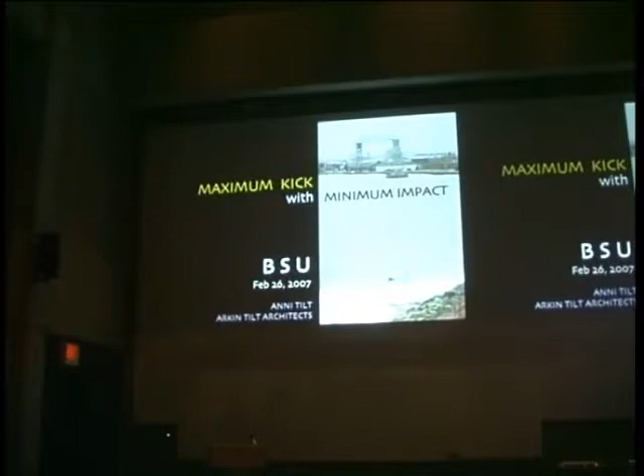Okay, this image, I just have to explain, we were actually up in Duluth. The Minnesota AIA has their design retreat up in Duluth, which seemed quite bizarre to me, but it's true that when you're out there, you're no longer in the city. You're somewhere else altogether. Oddly enough, this bridge, one of the first jobs my husband had, he actually went to the University of Minnesota. He did the measured drawings for this bridge when he was working for the engineering survey.

But what this picture is really about is this little guy down here, very entrepreneurial. He just took a blue tarp out there, and there was a big strong wind as the storm was coming up, and he sat on, I don't know, a piece of cardboard, who knows what, and zipped his way around the lake just with his blue tarp held out and some serious wind power. So there's minimum impact for you.

Okay, let me start in here. I don't usually like to do the doom and gloom slides too much, but this was a major story in the National Geographic in 2004 about the end of cheap oil. And I think that the implications of the use of oil over the course of time are going to become really imminent. I don't think we're going to run out of oil, but it's going to become a question of equity.

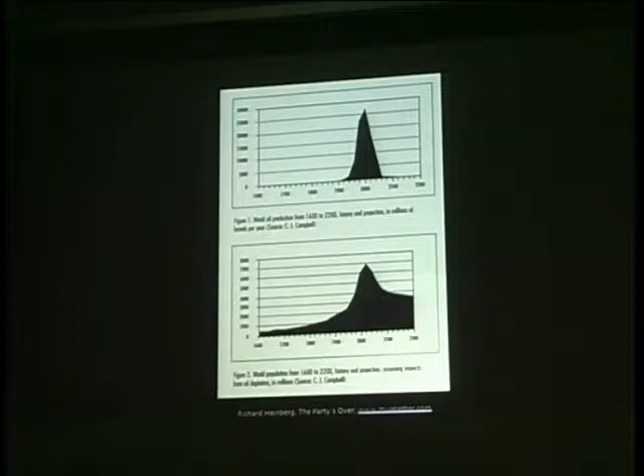This is from Richard Heinberg's book, The Party's Over, showing the correlation between world oil production peaking and the effect on population, as right now oil affects food production as well as the way of life. So these images are from a book called The Return of the Solar Cat, which is really wonderful if anyone is able to pick it up.

But the sort of human solution of, brr, I'm cold, and he goes to the ends of the earth and mines everything up, builds this elaborate procedure just to fire up his solid-state electric blanket. And what we're sort of advocating is a more simple, back to the basics approach, where the cat solves it in 2 steps. And this is our solar dog, the office dog, illustrating the point where he just follows that little chunk of sun around as it moves from the front door.

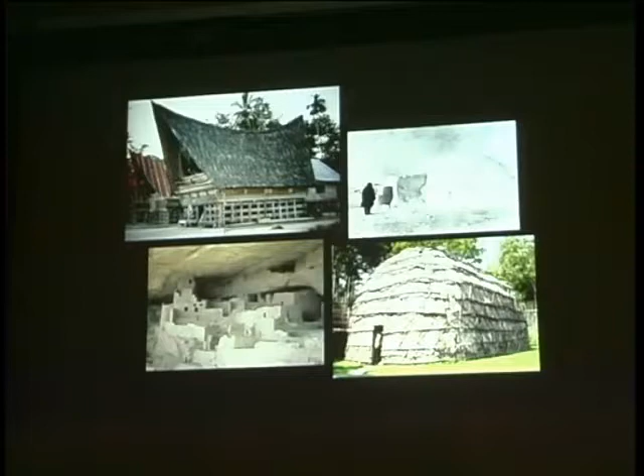Of course, ecological design is not a new idea in any way. It is only with the advent of heating and ventilating and air conditioning that we're able to manipulate our environments. So all of these buildings are responding to their climate using local materials, as well as having some fanciful details.

All this we sort of summarize in something we call maximum kick with minimum impact. And some days I don't really know what that means, but I think it's sort of an ecological bang for the buck. And so I'll just go through our goals quickly. The first goal, harmonize with the site. Really, the site is the starting place, whether it's rural or urban. Both the context, the views, the history and culture, the soil, the plant communities, wind directions, climate, all of these things come together, and that's really where we start the process.

The second goal, build as little as possible. Sort of an odd thing for architects to say, but I think that if you're looking to reduce energy loads and reduce resources, if you have a smaller envelope, there's less to heat, and then you can actually hopefully allocate the finances to details as well.

So third goal, buildings should be able to heat and cool themselves and generate their own electricity. A little harder in Indiana than it is in California, but I still think that there's a lot of technologies out there that can make that possible, and we should at least move towards that goal.

Fourth goal, maximize resource efficiency, really looking to the life cycles of the materials that we're using. Straw is a waste product, and getting the most out of each thing that we use, and not just the most in terms of thermal performance or structural performance, but also aesthetic performance.

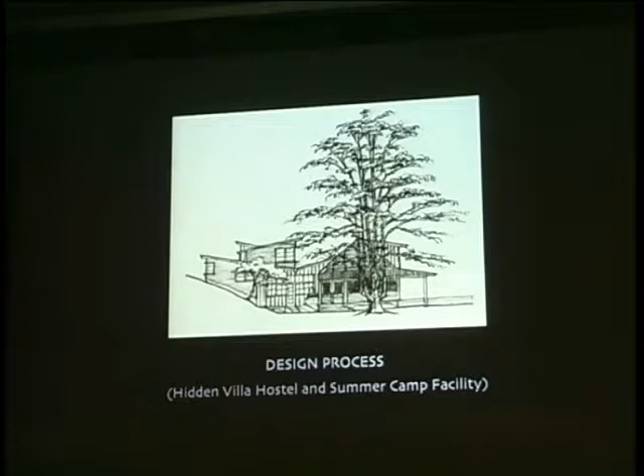I'm going to walk through our design process. Regardless of the size of the project, we use a pretty similar process. And I'm going to do that using a project we worked on about 6 years ago now, the Hidden Villa Hostel and Summer Camp facility in the South Bay. And it's on an ecological education farm, and they have had a hostel on the property since 1937. So our mandate was actually to replace it and provide the summer camp facility.

Does that work? Okay, if that's good enough, then I won't worry about it.

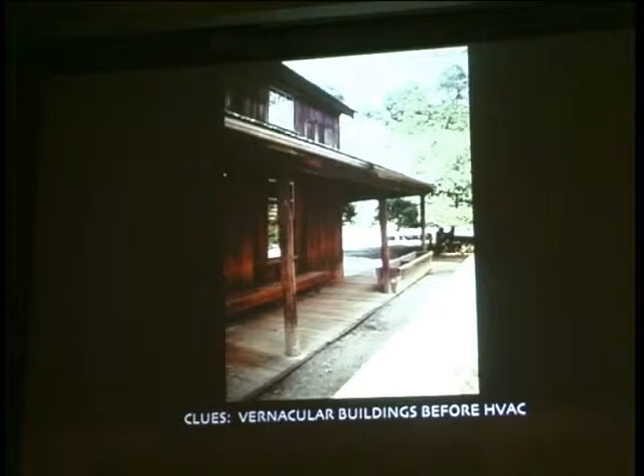Again, it's always fun to look at anyway, but old farm buildings, porches, overhangs, kinds of materials: what clues can we take from these buildings and build on that. Understanding the users, of course, is very important. In this particular project, they had up to 70 campers in the summertime, and then the rest of the year it's just a hostel, so there's actually very few people. So that was something that we had to work with.

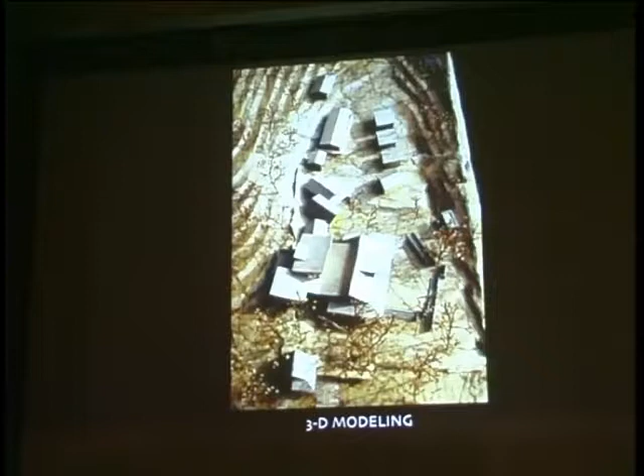And with every project, we explore options. Two to three usually, sometimes four, sometimes eight, but we don't go there very often. This particular project, we explored them in fairly rough cardboard models because there was a 21-member committee, and the models could convey these rough ideas very quickly, and they actually slotted into a larger site model. There's the final version with its context, and then we can use it as a tool and do solar performance modeling on it.

This is at our PG&E Energy Center, the public utilities building, and they have something called a heliodon. At the daylighting lab, you have something similar? You've got a heliodon. You guys are set.

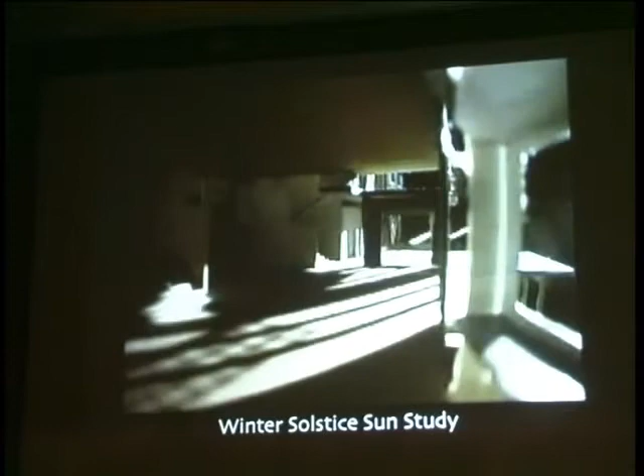So I won't explain how it works exactly, but there's a quick video, and again, these are very crude cardboard models with the idea that we can rip them apart and put them back together again. This is a winter solstice sun study on a project on the coast, really trying to get the light deep in the building. We also do thermal performance modeling on the computer when it's appropriate. This is actually an example from a project in China, much more challenging.

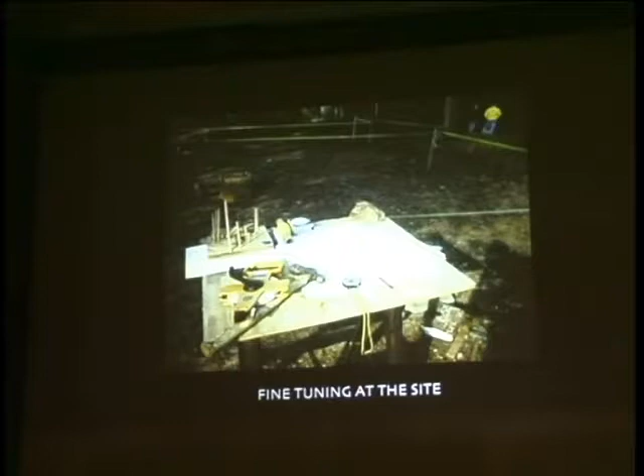Fine tuning at the site. Every project, you can see it's a fairly raw drawing. We'll take it out and stake it out and adjust it in terms of views or trees, or the survey's always wrong, so some large slope is different. And then collaborating with builders. This is more on residential projects, obviously, but as much as possible, we try to get them involved and get their ideas about fairly unusual systems, coordinated and as efficiently done as possible.

Building workshops is something we like to do when we're working with fairly unusual building systems, having a kind of demonstration project, a straw bale raising, or in this case, we actually did a rammed earth wall as a building workshop. It was for financial reasons as much as anything, because we couldn't afford to have it done any other way. But it was great because it got everyone involved, and there was a sense of ownership of the building as well. So this is the wall we built during the workshop. And we not only got a lovely wall, but we got this great staining on the floor from the dirt being dumped in and loaded up.

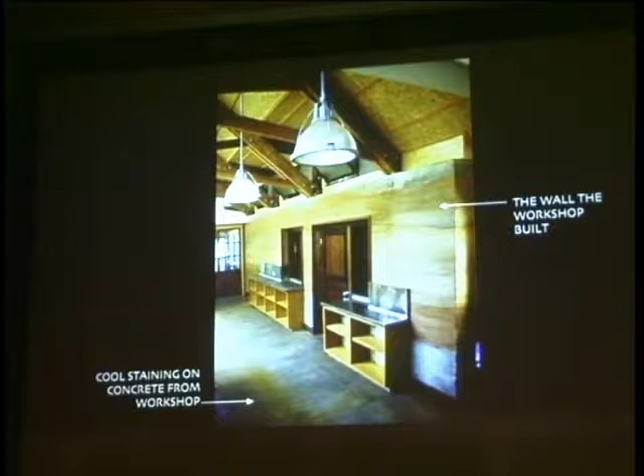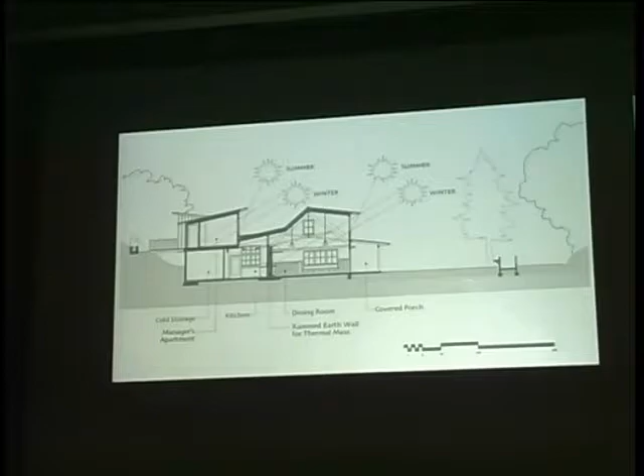Just a quick trip through this particular project. It's in this very narrow draw off of the main valley here. The idea is it's tucked behind what they call the sacred climbing tree, so that it's a little bit off the main path. And the entire building is pulled to the north side of this draw so that you get a sense of that canyon. Before, the hostel building just blocked the end of it like a dam. So this gives you a sort of flow up, as well as bringing sun into the dining room and the manager's apartment, where things like the cold storage and the kitchen are tucked away, thermally layering the section. Just a view of the dining room with its large clerestory.

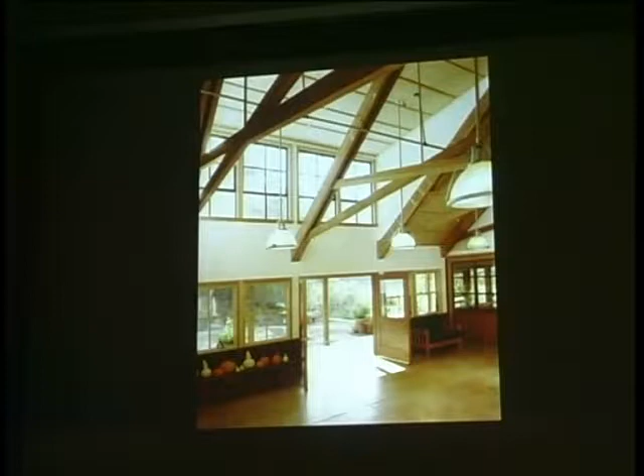All of the trusses here are salvaged fir. This is a pressed ryegrass board on the ceiling. And then even the wainscot here came from a building that was affectionately known as Ed the Shed, that had to be dismantled as a part of building this particular project.

And then from the exterior, again, large clerestory for the winter light, lots of overhang, and then a really deep porch. I mean, fairly straightforward technique, but it really worked well in this particular climate. And then large steps that also form a sort of gathering space on the exterior.

We put about 4 times the amount of program into this small space. There's the climbing tree on this side, and these are existing cabins on the other side. So one of the ways we tried to do that was by pulling pieces out, and it also reduces the scale. So the bathrooms come up and are their own building between the cabins and the main facility.

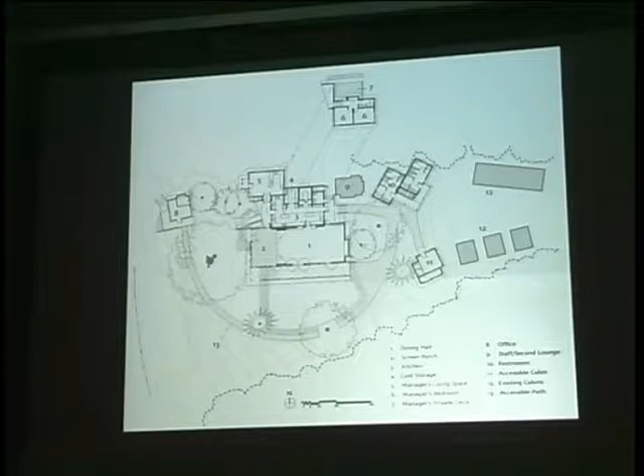And then on the front side, we pulled out the office function, and so it becomes a kind of marker on that main street as well, again with the facility behind.

Just a quick trip through the heating and cooling systems. This project has a ground source heat pump, a fairly expensive system, but because of its constraints, it worked well here. Provides both domestic hot water as well as heat for the radiant tubing in the floors.

Almost all of the air conditioning, or the conditioning, I guess you would say, is natural, just passive because of the high ceiling and high windows and louvers. A lot of that heat is allowed to escape. There's an additional evaporative cooler on the kitchen side for the added load from there.

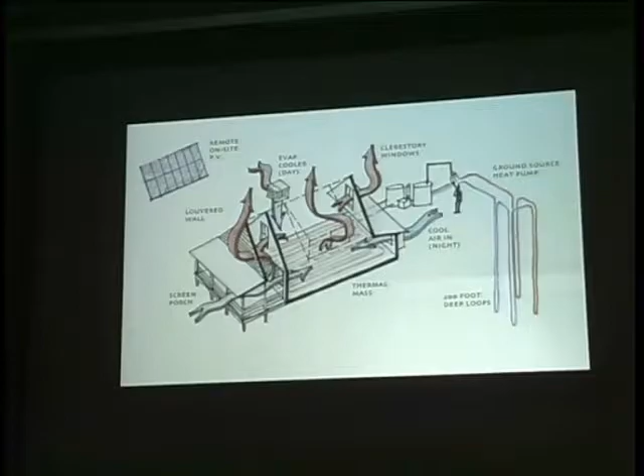This is the screen porch, which is at the west end of the building, and it is both protecting from that western sun, whatever can get through the climbing tree, and providing a high vent here, but it actually opens up, I think I have another slide, the end of the dining room opens up into it, so that when it's a summer camp, you can actually have this larger space that's really well ventilated, but in the wintertime you're closing down and only heating a much smaller area when it's a hostel, which is what it's set up as there.

The kitchen, on the north side, there's that rammed earth wall. So the rammed earth wall is also moderating the temperature from the high heat that's generated in the kitchen. And then it gets light both from these clerestories as well as a fair amount of windows on the east and west ends that are fairly protected.

And there's one of those ends, and just providing, I mean, these are fairly basic things, but little seating spaces for the staffers that are away from where all the campers are supposed to be. And then a final view uphill with these existing cabins, sort of trying to create that space and keep this, again, quite large building in scale by tucking it in the hill.

I think I've just got two projects talking about site, or I guess they're all about site, but that I want to particularly emphasize. This one is up the coast in a town called Gualala, where everybody has a beautiful view of the ocean. But this particular site was quite funky. I think I have a little model of it. There's a creek going right through the middle of it, and then power lines go this other direction.

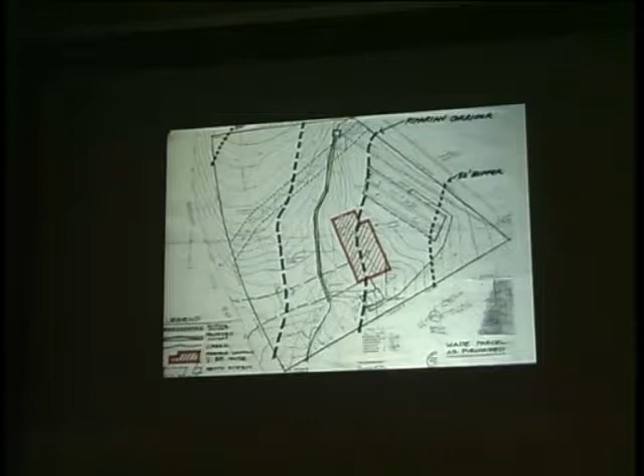And when our clients, who are really wonderful builders, bought this lot, it came with the permit somehow, I don't know. The proposal was to culvert the creek from one end to the other so that they could get the septic field in, because you need a setback from the creek, and then plonk a house right there. And we didn't want to do that. My owners didn't want to do that, and by the time we got there, the Coastal Commission wasn't going to let us.

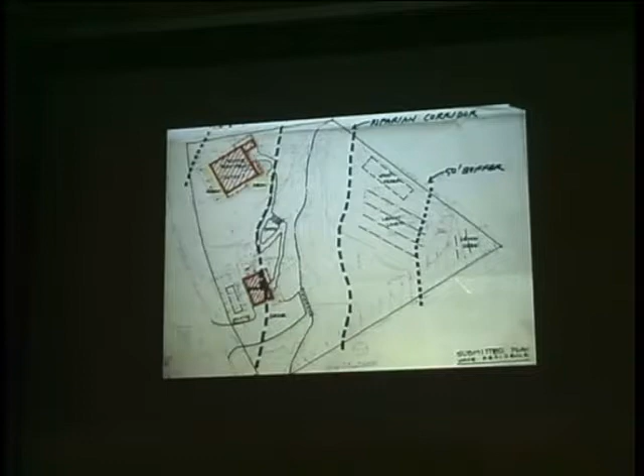So we sat down with all these various agencies, the Health Department and the Coastal Commission, and came up with a plan where they actually reduced the setbacks to the creek and allowed us to, it's almost a zero setback on this side, squeeze a little house up in the corner, get the septic on the other side, and then the garage is split out with access down here. And then there's this really lovely path up along the edge of the creek up to the house. And then when you get to the top, this is a little garage for your grocery cart.

You need something to move stuff in. Just a couple of shots of the woodwork here. Again, really wonderful carpenters, owners built this thing. And there's a final view of that. 1,300 square foot. Well, we can only call it a one-bedroom house, but several more.

This next project has been in the office a very long time, almost 10 years, and it's unbelievably tiny, but this is a gateway facility for the Arastradero Park Preserve in Palo Alto, California, 600 acres, and some of it is quite beautiful. The area on this side of the road is quite beautiful. On this side it's actually quite degraded and has been overgrazed and has relatively little vegetation.

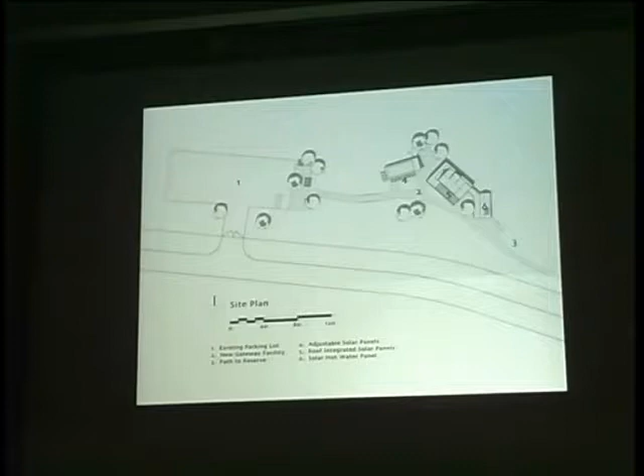So the strategy here was to work with the existing parking lot and build it relatively close to that, and then working with the land stewards, try and use it to facilitate the renovation of the park and the restoration. There's a series of small buildings, and these are roughly based on horse barns in the area, which are actually always fairly petite and kind of a little collection of buildings.

And these are sort of shoved into the hill. It's actually a scenic corridor, this road. So the visual aspect was very important. And actually, from the main direction, you don't even see the building until you're past it and you turn around and look at it.

It's broken up into these pieces, and what it allows us to do is have this space between the buildings, between this office and a meeting room and then restrooms out here. And in this space, volunteers can gather, have access to tool storage around the edges of that space, and they can have a meeting and prep while other people are passing, so that the people passing understand that there's something going on. It doesn't interrupt the flow, but they might get the idea, hey, I could do that next time, and therefore build on that restoration process.

It's a straw bale building. You don't see much of it from this side. It's all on the north side. Let me just go back a slide. You can see on these north edges the thicker walls are straw bale, and it's completely off the grid. It has two photovoltaic arrays. One, you can just sort of see it, and the idea is that it's fairly subtle, but this is a PV laminate

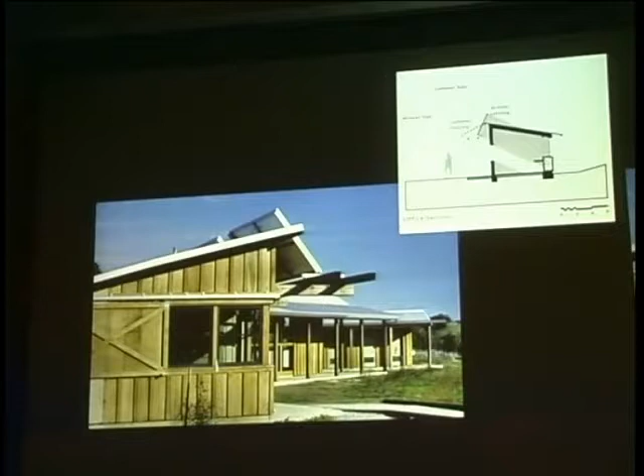integrated with the roofing. And then there are these other panels on the front of the office building that in their winter setting get more sun, and then in the summer you actually slide them down for a better angle and to help shade the building. You'll see that again. We like that trick. There's a shot of it from the front. It also has these very big shutters so you can completely close the park down. It closes at sunset, so it has a security aspect to it as well.

Just a quick shot of the interior. There was a barn that was dismantled on the preserve itself, so we actually had a lot of barn wood to use, and we wanted to integrate it on the interior as well as the exterior of the building. And then a final picture of that uphill, you can see these little straw bale walls, which actually also act as a bit of a fire retardant if fires are coming down that hill.

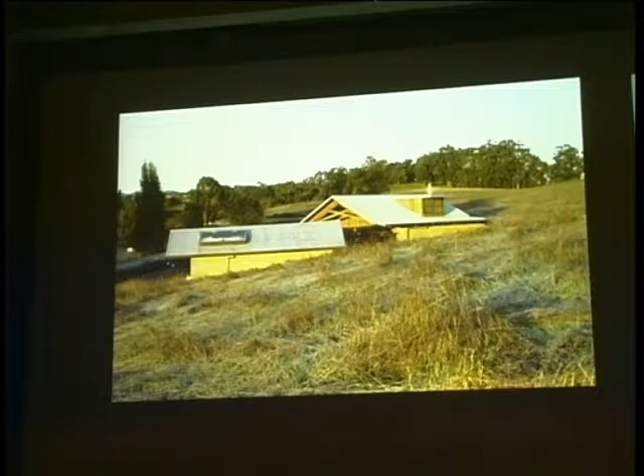Whoops. There's also a solar hot water panel here. It's just a direct, I mean, everything is very, very simple in this building. Again, with the idea that people can see it and it's working, that they get it, and then they can take it with them.

Water is something we're paying increasing attention to. I think when we started, we thought of it as more of an aesthetic thing. It's almost a building material, you know. It's something that you can work with for its beauty. And this is actually at the church, a symbolic baptismal font rock that the gutter dumps onto. I'll get into that in a minute. I think it's one of the things that's really going to drive a lot of development and can cause a lot of issues down the road.

This particular project is the Real Goods Solar Living Center up in Hopland, California. There should be a fair amount of information about this project online. And it's a project that David, my partner, was project architect on when he was with Sim Van der Ryn and Associates. And Sim gives you lots of elbow room. So he had a lot of fun with this project.

And this is really designed, the entire site was designed with water in mind. Ponds were excavated both for cooling and obviously for watering, but also that soil was used to build up the berm because it's actually a major floodplain. And I've seen it through a couple of floods, and it makes a difference.

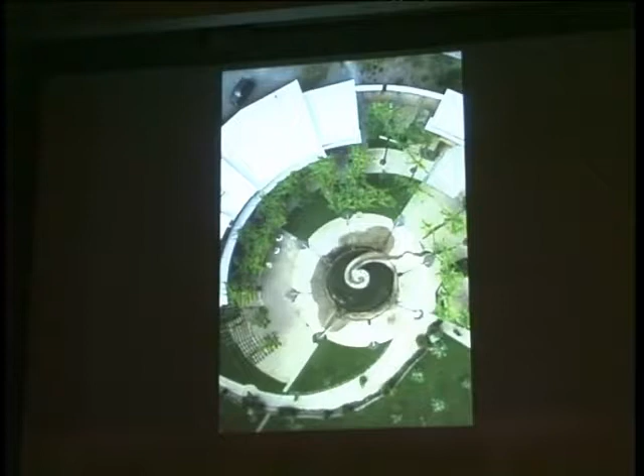The building itself is wrapped around this central oasis that has a sort of sculptural piece with a drip ring on it. It gets about 105 most days in the summertime. So having both the visual and water vapor in the air, as well as the sound of it, helps to keep that space cool.

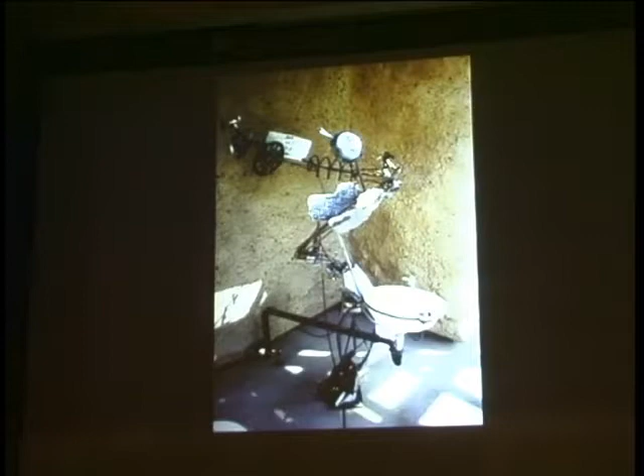And then there's some really wonderful sort of found object sculptures, water fountains that are built by the Otto Group. I think they're out of Philadelphia now. There's a picture of that drip ring in action. The kids can come out. There's actually a little flow of water that comes out and spirals into it.

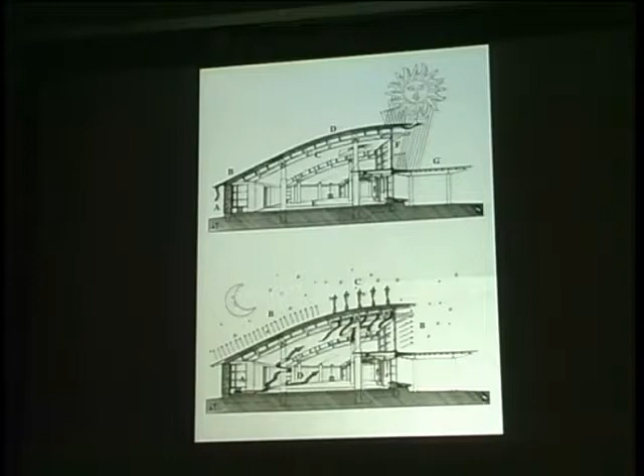The main piece, of course, is this showroom building, which at the time it was built was the largest straw bale building. It's about 5,000 square feet. It's been much surpassed now, thankfully. And it has a fairly simple solar section, and really it's based on keeping the sun out in the summertime during the day, and then at night, providing high ventilation so that heat that's accumulated can be released.

Just a shot of the trellis here. These are all wine barrel staves. You can see quite a bit of trellising on the end there, and those are those high windows. And I will go to the roof.

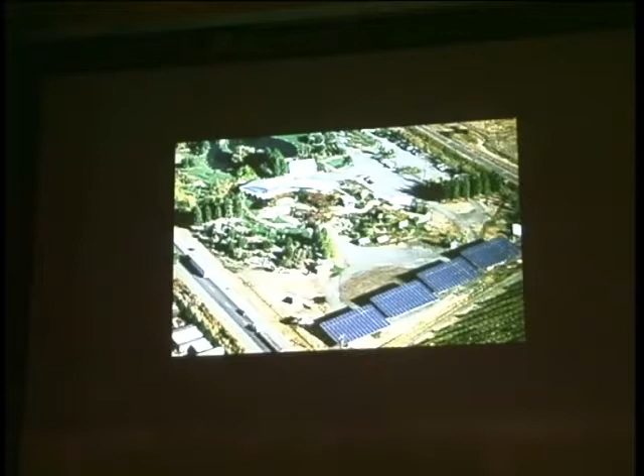A fairly large photovoltaic array, and then this is actually not owned by them, but a utility company built this very large array. David remembers these things. I don't know how big it is. The other wonderful thing about it is that when they have their SolFest, their annual event in August, it provides this very important shade, which is really great. It can do both things.

Just a couple of eco-resort projects that we kind of got through the master planning phase, and that's it. But obviously lots of fun to work at. This one is in Malawi, which is on a really beautiful freshwater lake with incredible fish diversity. There's actually a World Heritage Site just up and around the corner from this particular site.

And resorts are being developed along it, and they're taking the water out of the lake. It's a freshwater lake. All the villagers do that too. And then they pump their sewage just a little further out into the lake. So dealing with issues of wastewater was very important here. As well as, again, shade. These are actually fish drying racks, but frequently you see people sitting underneath these structures.

So there was a bit of a swale to the site, so we worked with Elise Brewster, landscape architect and water specialist, to develop a first level of reed beds, and then this planting zone down the middle that would take the storm water and filter it before it would run back down into the lake over here. And then having the buildings on the high point so they're getting breezes.

We work with the local villagers, this is the chief over here, to discuss what kinds of things would work, would be symbiotic for them, what kinds of things could be grown, what they could build baskets out of, and actually what kinds of building materials they would work with. These are some typical ones. They're really beautiful, and all of them are a little bit different, but working with the reed structures.

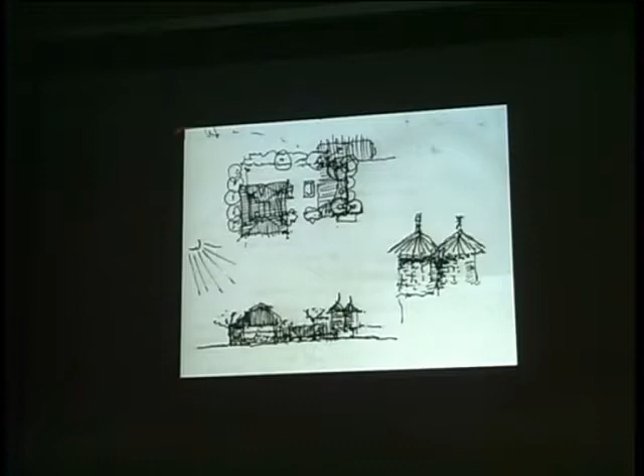And I tell you, all the concrete buildings are unbearable, but the mud huts with the thatch roofs can be quite comfortable. So we're working on a kind of, they don't have straw, but they have corn, so a rolled corn husk version. And I don't know how far they've gotten with it. We just suggested it. So we came up with these little village compound pieces, and each one would have its own outhouse, and they would come in these little pairs.

And the composting toilets actually are incredibly functional, and they provide a really important entity. They tend to scrape the sludge out of the wastewater treatment plants for fertilizer. So providing a clean, safe source of fertilizer as a byproduct of the waste treatment was really important.

And this one is in Baja. This is the San Miguel Spiritual Retreat and Yoga Center. And again, a really beautiful location and really shaped by water. They get their rain in these huge sort of monsoon events called chubascos, and you can see it's really shaping the granite itself. Petroglyphs on this rock down here, really beautiful site.

And so just using the water, they were lucky enough to have springs at the top of the site in this mango grove, and so bringing the water through the site and kind of purifying it and celebrating it, and then all the way down at the end of the site, providing this black water swale that obviously is treating the water, but also providing a protection from the fire vectors that come up the mountain.

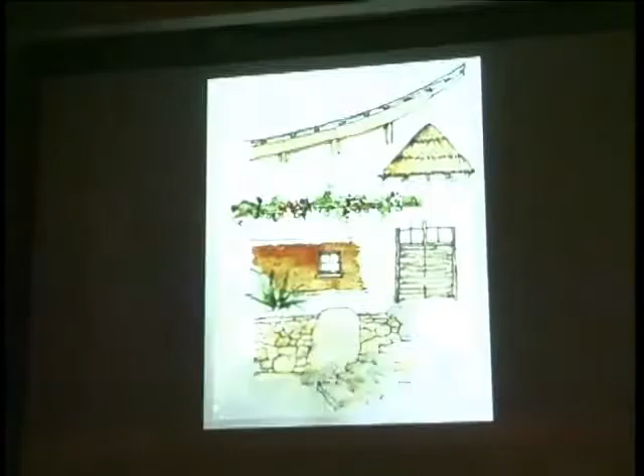There are some really beautiful rock figs, some natural features in the landscape. So as much as possible, we just sort of left them be and provided paths to them, and then the buildings themselves are working with native materials, because that's what's there and that's what works well. This is a chiname, just a woven stick that provides privacy but allows the breeze through.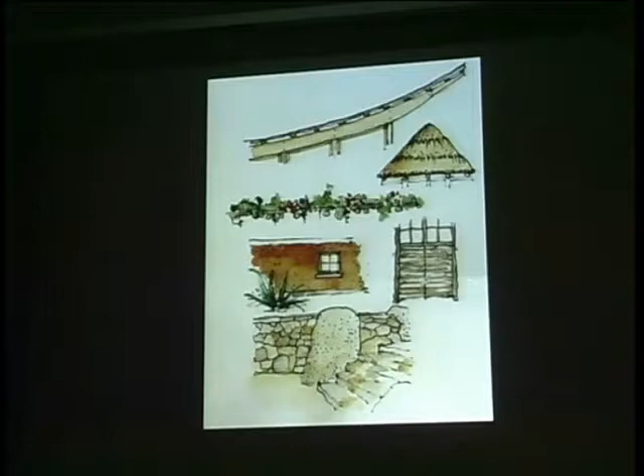Lots of rock work, trellises, and then in some cases straw bale with an earthen finish, palapas, and then just a few centerpiece buildings, these kind of uplifting, slightly translucent roofs we were proposing. I won't go into it too much, but there's an image of the yoga hall at the end with a walking meditation around it.

This is the front of our office, and solar is something that we work with a lot. We think of it as a sort of design tool sometimes. We don't own the building, but we installed these solar awnings with the blessings of our landlord. And they also move. They have two settings. It actually raises up above the window, so it lets the winter sun in, and then in the summer you actually drop it, so you're cutting off a lot of that sun.

This is not my car, but one of the presenters at this design retreat was the chief technical officer of Tesla Motors. And I thought because it's Indianapolis, I just had to show this thing. It's an all-electric car and high-performance vehicle. And it's really quite exciting, the technology that they're bringing to it.

This is our version. This is our electric car, which is a little lower tech, with less range and the whole business. But again, trying to work with these technologies, we try and experience them as much as possible. We have a windmill on our house, just to test it out and see what the foibles are. But the truth is that most of the time we just ride our bike. It's not very far. It's got a little plug instead of where the gas should go in. Yeah.

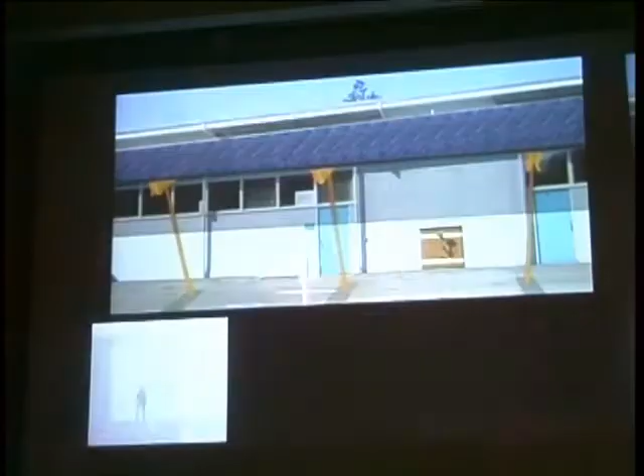We did a project with Timmins Design Group, also for the city of Palo Alto. They had a large photovoltaic project, sort of a demonstration project that they got a grant from, I think it was a federal grant from the Energy Department, and they looked at putting it on 3 sites. I'll just show you 2 of them quickly. Very simple buildings, but providing these kind of awnings with just a little bit of color in the structure, which provides shade as well as a fairly large array on some community buildings.

And then this is their municipal site, so this is where all the city cars come and go. It's actually kind of an ugly building, and it's right on the highway. So we got kind of excited about the idea of doing these big tracking arrays that you could see as you're driving up and down Highway 101 as people were commuting.

So there's also a very large parking rooftop installation, but these are the fun ones, and I think this just shows what they would look like as they're spinning around. Our model maker put this thing together. Kind of goofy. Okay. So it's under construction and hopefully be done by the summertime. And the city council made them square instead of pinwheel, I'm sorry to say.

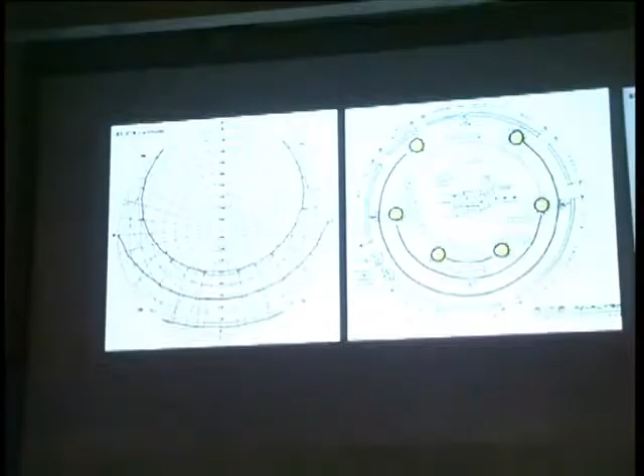This is a site in the Wrangell St. Elias National Park, in Alaska. Very different climate, very, very beautiful, very remote. Here's the winter sun from about 10 to 2. And then in the summer, it never really gets dark. But the main season there is May to October, so that's kind of the design range we were working with.

There's an existing building on the site that we're adding to, the kind of log cabin starting point. And then we looked to some of the buildings that were done locally for the Kennecott mine, copper mining up there, just in terms of how the dormers work, how things shed snow.

And then it's actually a straw bale addition that we did, but everyone must stay in a log cabin when they go to Alaska, so it has these log slabs. But what's great is that it's actually the waste product, right? They cut a square beam and you've got these round parts that are left over, so they're using them, and because it's a rain screen, it protects the bales better than just a plaster, actually.

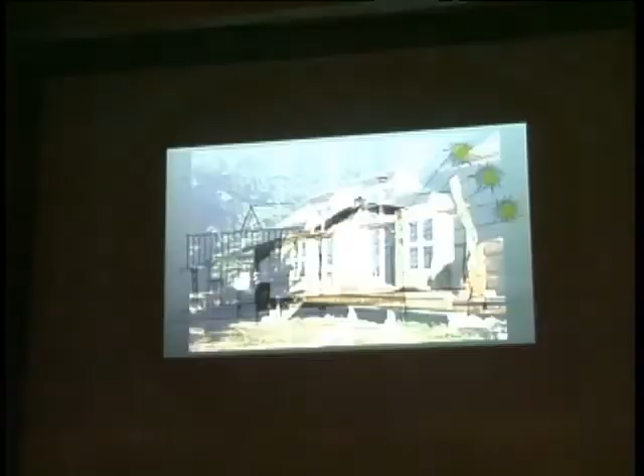Just a quick section there of the main dining room. The owner had all these spruce beams that were salvaged from the site. Concrete floor, it's actually insulated below as well. And that's the shot. This actually cranks around to the south, but it also provides a nice view of the Nizina River. Okay.

Let's see, this project, skipping down to Nevada here, this is the one that won the Committee on the Environment Award 2 years ago. And it is a really interesting site. This is the Sierra Nevada mountain range here. Tahoe's kind of right over there in the corner. And on the other side is the sort of flat plain of the Carson Valley. So working with two very different environments on either side in this kind of transitional landscape.

The idea is that from above, as you enter, you get the sense of the sort of flatness of the Carson plain behind you, and the landscape actually rolls up onto the roofs of the garage and guest house. Whereas from the low side, the building kind of juts out like the boulders, like these mountains beyond.

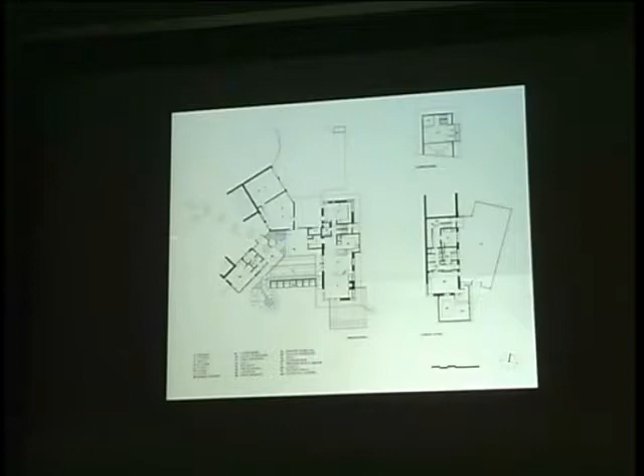These two wings, the garage guest house and the main building, form this courtyard space between them, which is really important in terms of providing a protected space. Nevada is incredibly hot or incredibly cold, and the winds come whistling down the mountain, so here the guest house roof actually lifts those winds up a little bit. And then there are photovoltaic panels on a trellis that also shade that space in the center there.

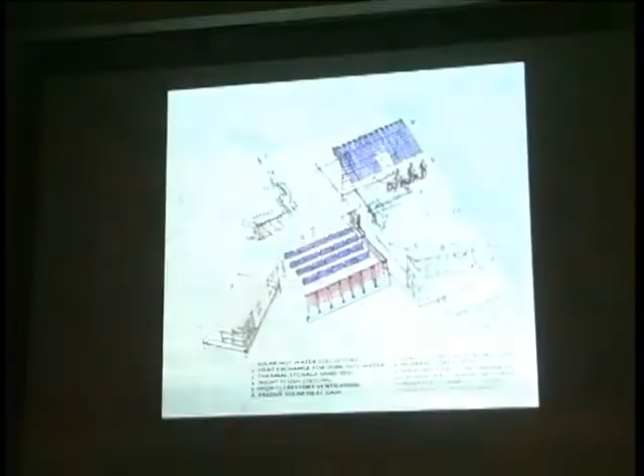A diagram of the heating and cooling and energy generation. These are those panels that are adjustable. I think I'll show you in another slide. And there's an additional array up here that is laminated onto the roof. Again, visibility was very important. There are not any neighbors in these shots, but there are neighbors, and how it's perceived, there's an elaborate design review process, was all very important.

And then down here are solar hot water panels, and because of the grade change, they're actually dropped below the level of the terrace. So you don't perceive them from the terrace itself, but they're actually gathering quite a bit of sun. I'm sorry, there's solar on the roof. That's the only place you can see it from.

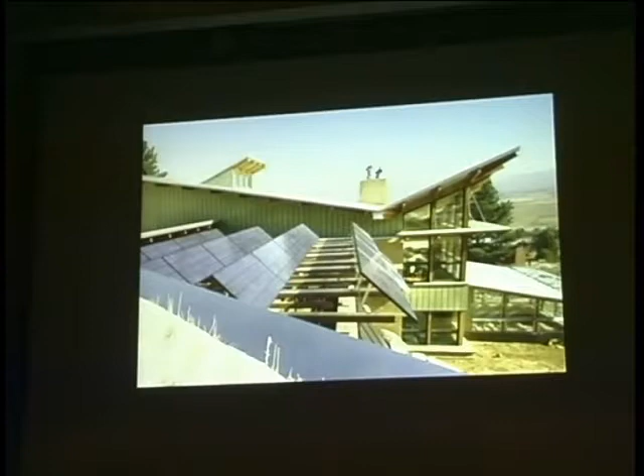And these tilting solar panels, these adjust. The other nice thing about that, of course, which we didn't think about, is that they actually shed the snow in the wintertime as well, because they're cranked up a little bit.

So just a diagram of the solar hot water heating system, the array of solar hot water heaters. They're heating a glycol, a solar fluid. It goes through the solar storage tank where domestic is taken off, and then it is feeding these loops that are in a sand bed underneath the slabs of the buildings. So you can see them stapled in there, and that becomes your storage for the heat.

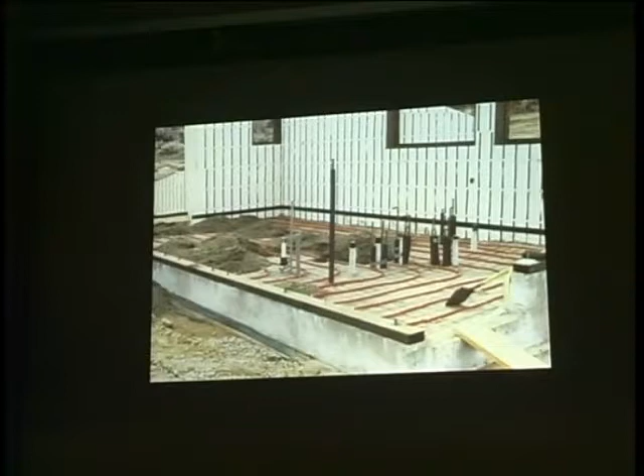So the issue is you can get a week of cold weather and you're not getting any heat, but having stored that up, it's still radiating over time. It actually takes about 3 weeks for the system to come up to temperature. You turn it on in the beginning of October, something like that, and then it continues to radiate. Occasionally it doesn't get quite enough, and there are some backup systems. But with the normal weather cycle there, it works quite well.

Additionally, just sort of traditional passive solar thermal storage in a concrete floor, concrete topping slab. This is in the living room with a fair amount of shading and overhang. So then in the summertime you get just about no solar gain at all.

This house has a number of different building systems. As a demonstration house, that was important, but given how long it took to build, I wouldn't really recommend that. It has insulated concrete forms where it's retaining on the lower level, straw bale on this main level. It has structural insulated panels for the roofs. It's got lots of stuff.

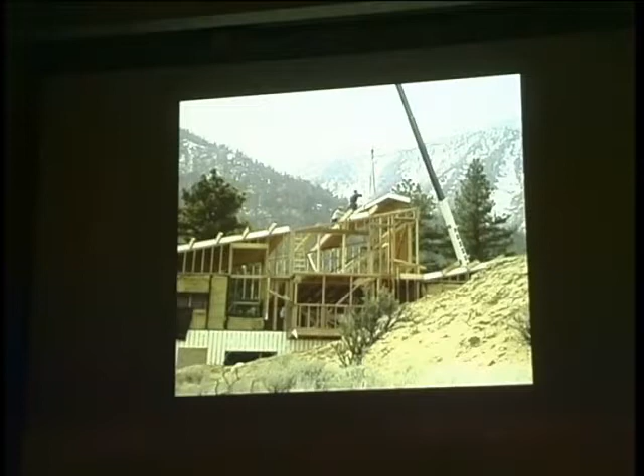The main portion, including the straw bale, is coated with a soil cement from the soils that were on site. They were actually tested and adjusted only slightly. They work really well for that. And then you also get the sort of color sense that it is really one with the site.

A couple of interior shots, the obligatory truth window. This one actually was something we had sitting around the office. Never seen a corner one before, and now I know why, because it's really hard to do a corner straw bale truth window. But you can see that same sprayed earth finish is on the interior, but it's just troweled smooth. I have a couple more shots of that.

In the hallway, again, the lower level is kind of buried here. So there are thick glass panels in the floor here that allow light to transfer down there. There's an example of that on the lower level. And we found all sorts of wonderful salvaged wood, and we used all the parts of it. They milled them up, and then we used the offcuts as paneling and salvaged doors and on and on.

Just a view of the kitchen. The countertop was made by Counter Productions. I think they have a new name and probably a new owner now in Berkeley. And this particular one, the owner actually found the glass in the salvage yard, in an ore cart. Glass used to be made with manganese, which turns this sort of pinky purple in the sun. So you could actually read bottoms of jars and whatnot. And this is this great piece that has a melon holder, olive pits, or something like that. It was kind of a mistake, but a happy mistake.

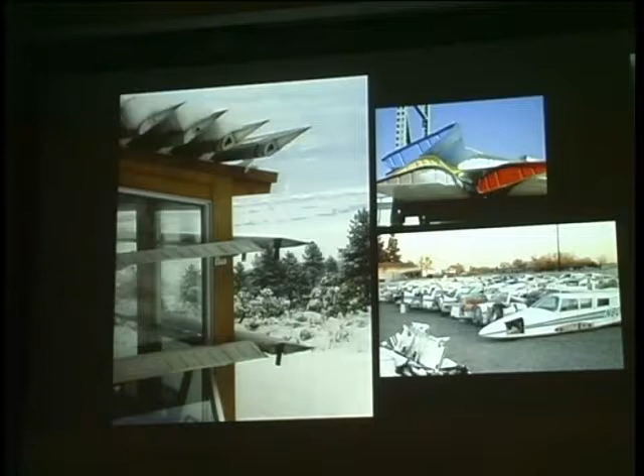And so we went to the small airplane graveyard, and they have all these flaps. The ones that actually function are incredibly expensive. But the ones that are a little dinged up and can't fly anymore are about $40 a piece. And so those were sandblasted and it became our shading fins.

And just a few other details. The trellis is supported on salvage railroad track. And in the theme of it, we used ore cart wheels that I found at that same salvage yard to support them in various ways. And this is actually copper mining screen. And the copper pebbles are sort of rusted into the screen. And they have this great greenish, I can't tell when the light's on, cast to them, which we had our metal fabricator bend them up and make into lights. And a final view of that project.

Whew, how are we doing?

Earth and straw materials we like to work with a lot. Again, for obvious reasons, but straw bale in particular, well, there sure is a lot of it, and it used to be burned. I can't do that in California anymore.

I don't know about Indiana. Anybody know? They don't burn it here? Uh-huh. Well, that's good too.

But so bales are a commonly available material. We didn't have any problem even getting them in Alaska. And Baja is not a problem. It's amazing. There's two basic types. You guys probably all know this, but there's load bearing, where it's actually taking the weight of the roof, and then non-load bearing, where the weight of the roof is taken by something else.

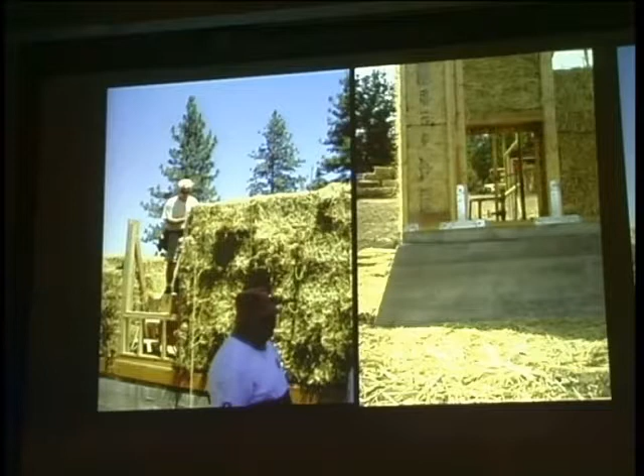And it actually has the pinning done on the outside using bamboo tied to the bales on either side. But it's a fairly simple single-story structure.

Moisture, of course, is the big bugaboo in bale construction, but frankly, it's not that different in wood framing. You need to be really careful about controlling it, and usually you say good hat and good shoes and a coat that breathes. So, a nice deep overhang, a good foundation keeping it off the ground, and then allowing whatever moisture is getting in there to breathe. No Tyvek.

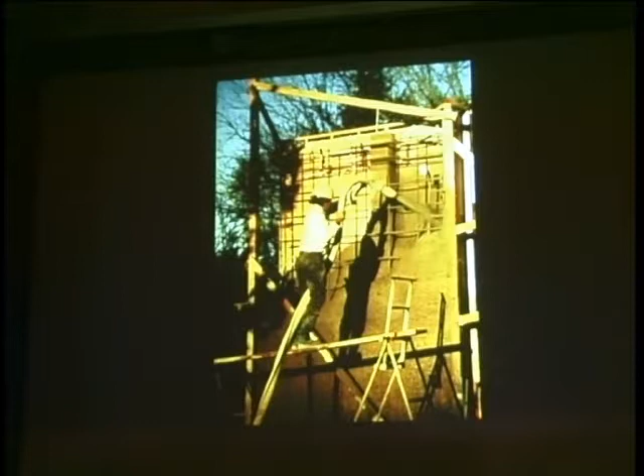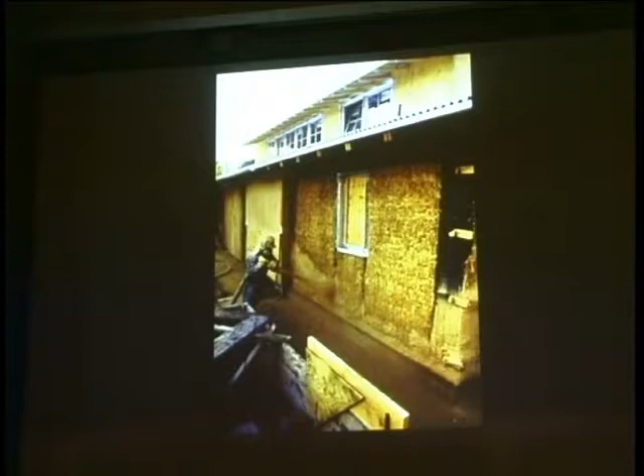And then here it is being sprayed directly onto the bale wall. You can see building paper. That's actually the wood portions, but it's sprayed over the entire thing, and it forms this really amazing bond with the bale, just by the pressure and the fact that it's sort of friable on the edge there.

On this particular project, we did a test wall, so that the building department would be happy with the out-of-plane loading, and the engineer figured out that if it supported its own weight, that would be a factor of safety of 4. And so he rigged up this thing and tipped it over, and it's unbelievably strong. He actually had to make a pool on top of it to break it, an additional, I think it was about 8,000 pounds.

So that project is a residence in Mill Valley, a fairly modest residence, and like a lot of our straw bale projects, it's a bit of a hybrid. It has wood framing on the clerestory and in a few places where there's plumbing. But the depth of the wall and the insulation and all the qualities of the straw bale, I think, really shine in this project. And again, this is sprayed inside and outside, troweled smooth, and then grout washed.

The interior has what we call the Great Wall of Storage, but it actually is a shear wall. So it's for the building department, helping to take the load off of the bales. And they're built with 2x12, so there's enough depth that we could actually have storage in what is otherwise a fairly small footprint. It's about 1,800 square feet. It's actually designed to have an office loft in the end, which was never built. And eucalyptus columns that the owners actually harvested on the other side of the site.

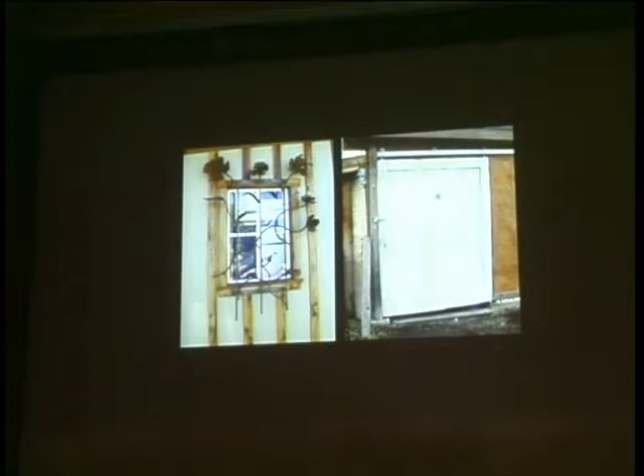Sort of lovingly made. They even had to have bars on the window, so they had an artist make these lovely metal flowers. Salvage door here. Even the glass above this wall was melted down from bottles.

This project is up in the Level Valley as another residence, and this is actually a sprayed earth house, known by its acronym PISE. So the walls that you see here in the lighter color are sprayed earth. There's a few rammed earth pieces, these columns and the fireplace. Rammed earth is incredibly labor intensive, and especially in California that translates to incredibly expensive, period. So this is a more affordable version of it.

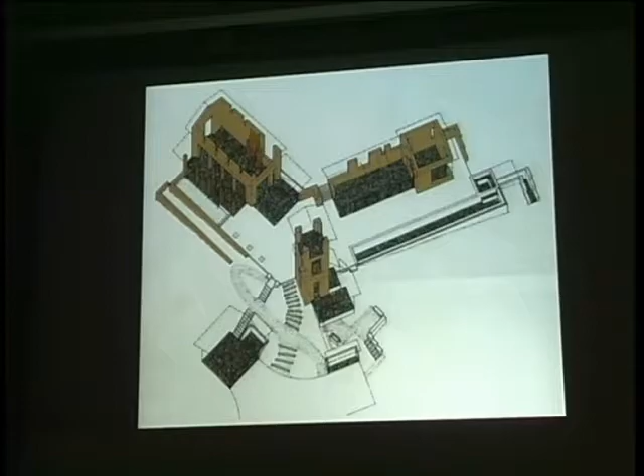And we really tried to use the sprayed earth to its advantage. So it actually retains quite well. So it's berming into the hill on both sides here, retaining on the lower edge, and then creating this sort of zone of living in what is otherwise a fairly steep hillside, so that you can see it on the retaining side. And then on the western edge over here, we're sort of bending around the contour.

Beautiful views, but really quite hot, west facing. So having a very deep loggia to protect that side, and then windows above it. Actually, the light bounces off of the roof up through these windows and onto the ceiling. And then by the time it's sunset, you get this really beautiful light streaking through the room. Just a detail of the fireplace, pretty subtle rammed earth walls. We use the same material, so there's very little contrast there.

And then the end of that main hall, again, east-west is its long axis. So using a sort of trick of pulling down the kitchen to get a big south-facing window above, and then in the winter you really get light all the way through that space.

I can keep going a little bit. I'm never going to get through these things.

A tower in the front. It was something we sort of struggled with a little bit, but in addition to providing a nice view up there, it shades this outdoor space really nicely. The master bedroom wing with a sprayed earth piece on the end, and then again where we have plumbing and other complications using wood framing, also for contrast, but still getting light in from the south from those high windows, as you can see up here.

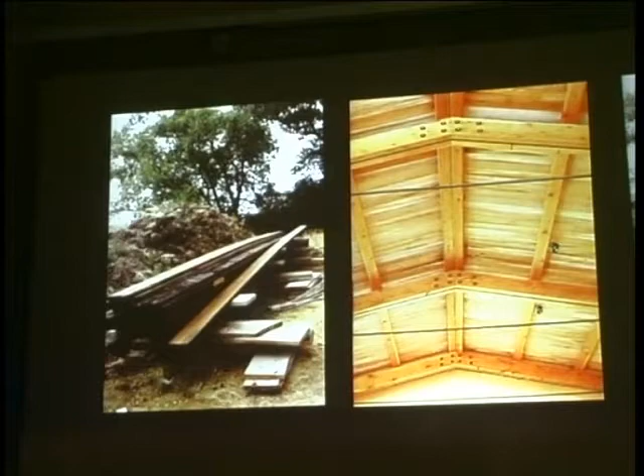These are pickle barrels from Vlasic Pickles in Wisconsin that were really disgusting looking on the outside, but we split them and used them. They're actually not particularly structural, but in the ceiling sheathing here, and you get a little bit of salt streaking. And luckily it doesn't smell too much like pickles, but it has that sort of patina inherently in it.

This project is up in the Gualala area, Mendocino County, where they've done a lot of logging, and really showing off the wood was very important here. It's sort of in the trees, it actually overlooks the ocean, but because of that tradition, showing it off, 95% of the wood that's in the project is visible.

The main form is much like these wind-blown hedgerows shaped by that. And we actually looked at it at the UC Berkeley wind tunnel to study that and the effects of it and to create comfortable outdoor space.

Urban area, Belmont, California, and it was about a 5,000 square foot lot. Is that right? Sound right? And it has 2 existing really beautiful oak trees. I think no one else could figure out how to work around the oak trees. So that was the main thing we were trying to do.

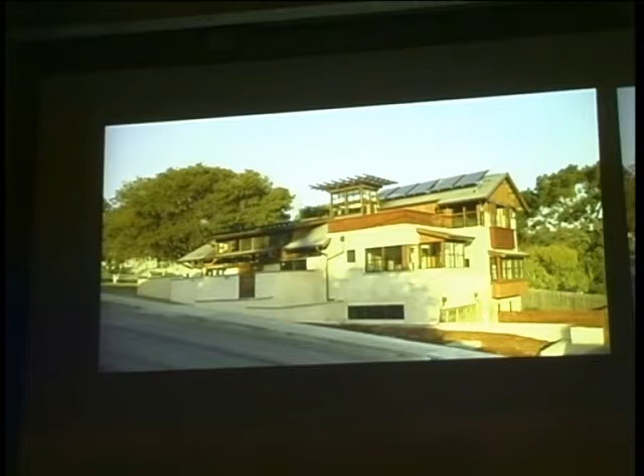So it becomes a kind of a roadhouse on this main busy road, and then on the back side it has a much more rural sense to it as it's tucked into the trees. And both of the owners are strong advocates of solar technologies, particularly bicycles. Bicycle commuting is a big thing in the South Bay. And they actually moved to this neighborhood so that they could have an easier bicycle commute.

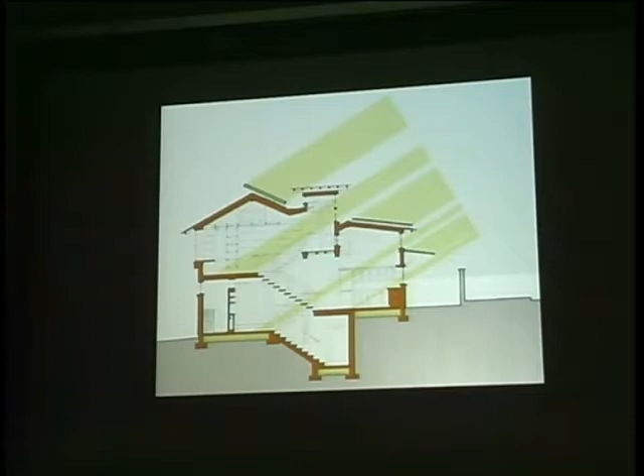It incorporates the solar hot water system I talked about on the other project. You can see the sand beds on these lower levels, as well as photovoltaics, and then daylighting in the middle, and it has these courtyard spaces on the front here with an additional privacy screen, so you could get ventilation even though you're still kind of one with the road there in front. And again, a whole lot of salvaged wood in this project with high clerestory, so it really highlights that.

And then in the middle, as this building is climbing the hill and working its way around these 2 oak trees, is this tower piece that is both providing natural ventilation for the whole building as well as bringing daylight in. A little salvage window up there, all salvage trusses, and it actually has a glass floor, again, for daylight. And as you work your way up, every square foot is used, it becomes the library. At the end of this is a study, and it's also access to the roof deck out this way.

And even as you go into the kids' rooms, the kids' rooms themselves are fairly small, but there's a wide spot in the hall that becomes a common space that they can use. There are these desks that flip up out of the walls for study space, and it's the restroom access, and it's the laundry room, and it performs lots of different functions, as well as accessing the back garden side.

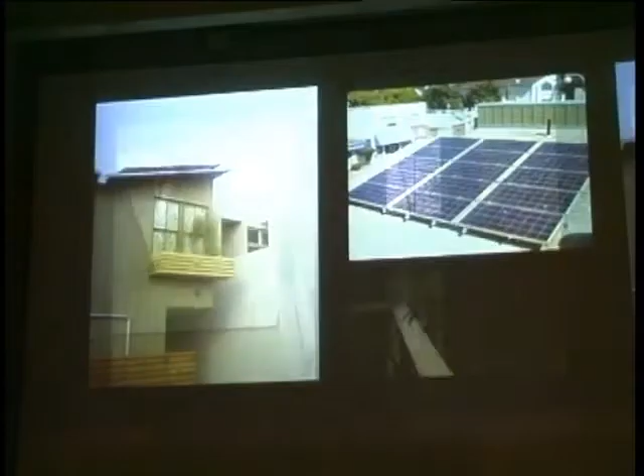And then it has a fairly sizable photovoltaic array on the top, which has battery backup because, you know, when you're doing psychotherapy, you don't want to have a sudden change like that. So it's all set.

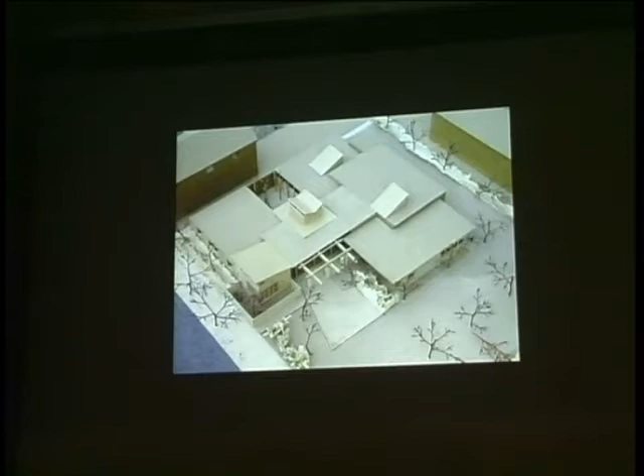But in terms of this space, in the center is kind of the hub of the financial offices, and when they have a client come, it's all about this central space, and so it has very carefully controlled light, and it has a sort of cupola in the middle, opening up to the courtyard on the one side. On the other side, it opens to the entry, but you can close it off completely with these doors.

And then when the client goes away, you open the doors, and it becomes part of the entire office, and really opens up to the garden on both sides. This is the entry piece that it opens up onto. Every workstation, even this one here, is borrowing some light from the conference room, so bringing daylight as much as possible to every piece. There's a final view of that.

How are we doing on time? I'm going to skip this one. Maybe I'll skip that one too. We just work on images there for a second. Let's see.

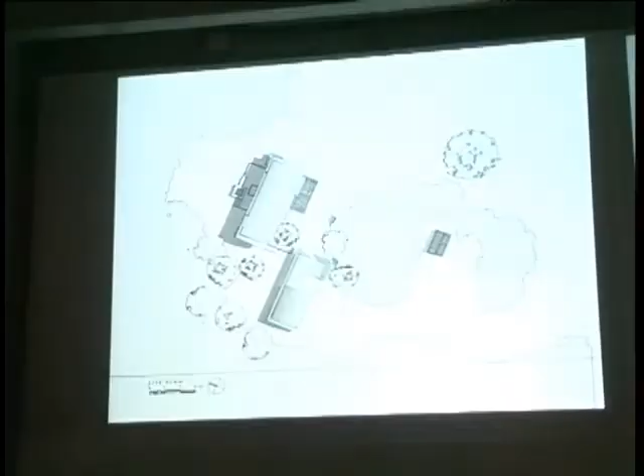Let me just point out in this project, we're working both with form, but also trying to integrate photovoltaics in unusual ways. This one has the peel and stick roofing on a curved building. The buildings are generally opening up to the north because the client is an artist, and bringing the north light in was very important.

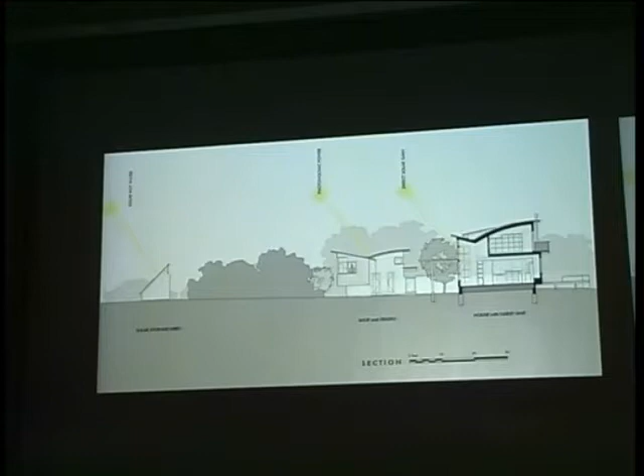And trying to create sort of courtyard spaces and work with the solar aspects of this project in Bolinas was very important. So there's that main courtyard. The building itself is very small. It's about a 1,600 square foot building, with a 300 square foot guest unit plus this artist studio.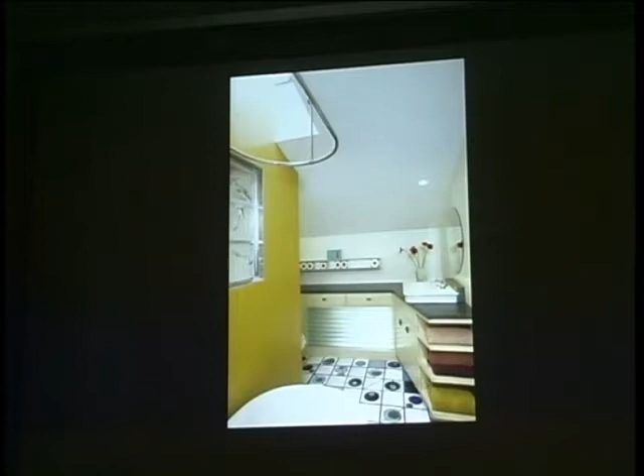The owner has many personal touches here. This is the sink from her childhood home in Philadelphia. And then she did these glass blocks, some of which incorporated shells that she found on the beach, and it becomes a reverse of that and kind of a ghost. And those are incorporated in the floor, and then we had some leftover ones, so they showed up in various places. There's some more in another bathroom, and then again, borrowing light here from the entry on the other side.

A park project that we're working on. It's too much to explain, but there was a sort of a funny chunk of rural land in the city of San Pablo, which is a fairly dense, very urban, slightly impoverished town. And having this scrap of rural land was very important to them.

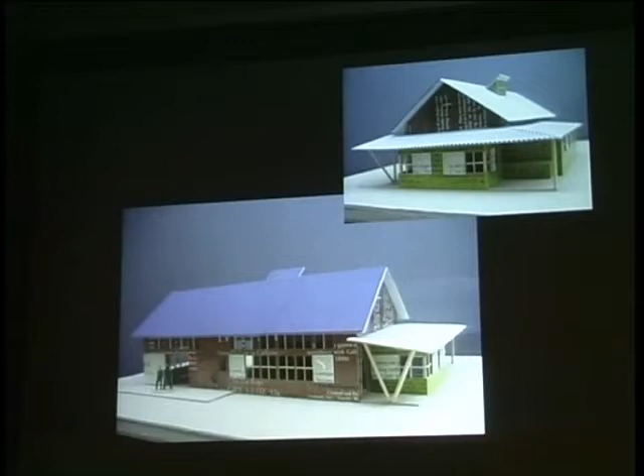And then at the end, so this is the heated space here, and at the end there's a kind of a classroom that has no heat to it, but it provides an outdoor space. So these doors can be slid open, and it connects to the park on both sides.

Another project we're working on, this is a residence in China, using an insulated rammed earth system. It's something that's probably too expensive to do here, but we're actually working on it in Canada a lot. And this building, again, this is just the living room, very simple solar section, but the buildings themselves are formed so that they take advantage of the summer breezes which come from the south and actually compress them, which increases airspeed. So it cools it off in the summertime.

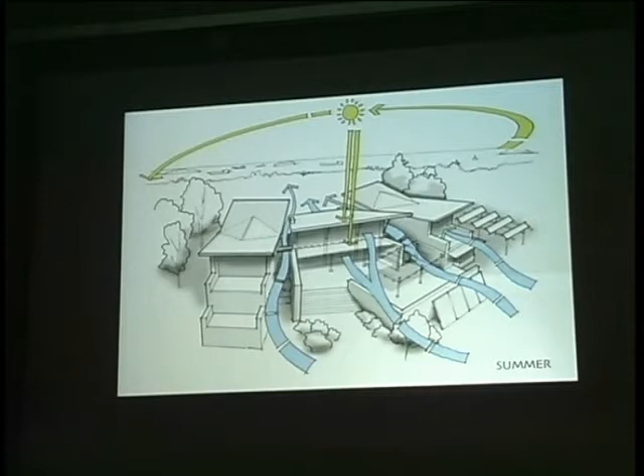Lots of overhangs for the high sun. And then in the winter, the winds actually come from the north off of the river and are deflected around these buildings while letting in the lower winter sun.

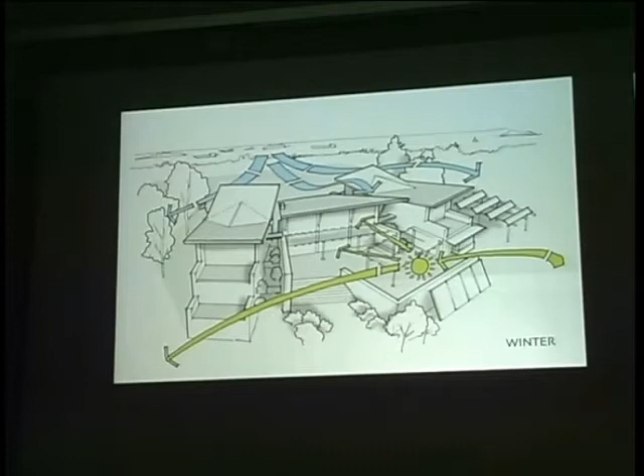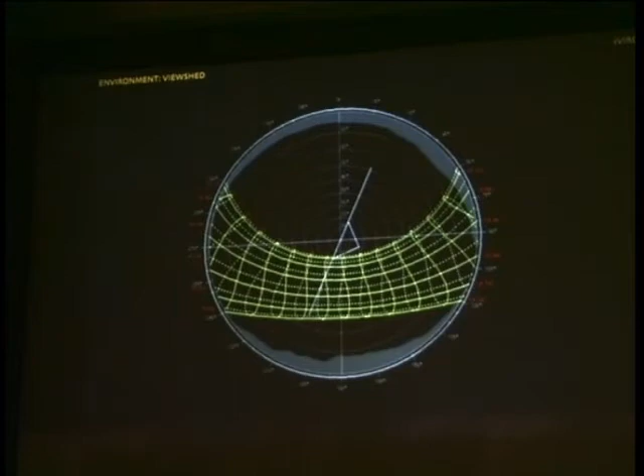I'll just go through these quickly. This is some analysis we did for a green classroom building for the Carmel School District. It's a public school, and they happen to have the good fortune of having an amazing habitat project that incorporates a garden. So these walk through solar aspect and whatnot. I think the view shed is supposed to move. Never mind. Oh, here we go. Just showing the shadows.

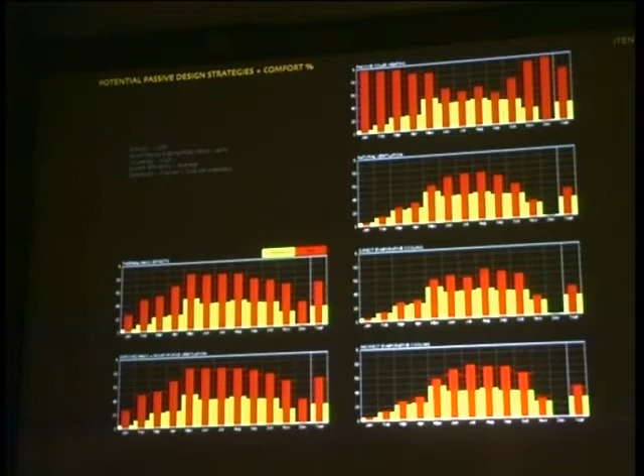I mean, these are some fairly simple tools that we can use to study how much light and insolation there is, looking at temperature and rainfall, and then putting those pieces together and looking at which passive design strategies might work for any particular project. And I don't need to go through green classroom benefits too much. But we developed 3 options and then had to cut the program in half.

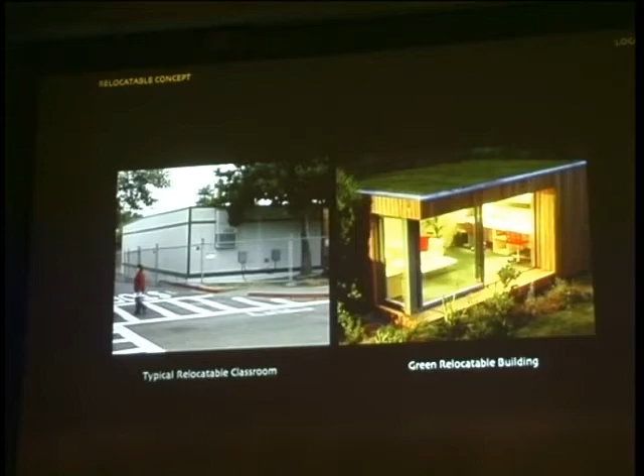What happened was the school district decided that maybe they didn't want a building right in the middle of this 10-acre piece of land that they mostly use for habitat. So we came up with the idea that the building itself could be relocatable, so that they could have the building where they wanted it, which is in the garden. But if at some later point the school district wanted to move it, that was a possibility. So we're actually working on creating a green classroom that is maybe replicable as well.

So these are modular components, a very crude sketch of how it fits into the garden space here, or the main entry here, and a path from the adjacent middle school over there. And one kind of expandable classroom building with a cooking kitchen in it, a dining terrace. There's actually a pizza oven that they have existing over there, and a storage barn.

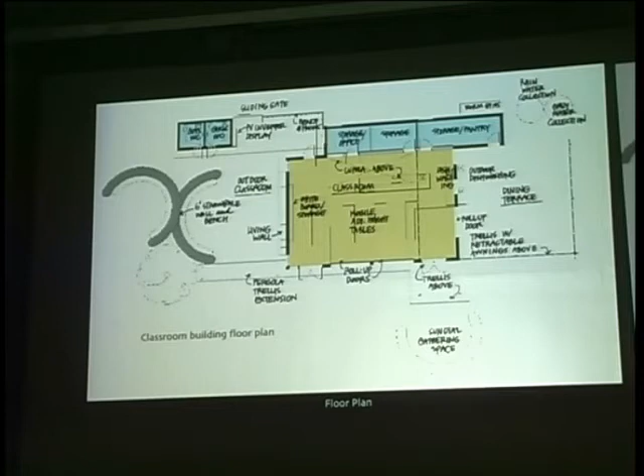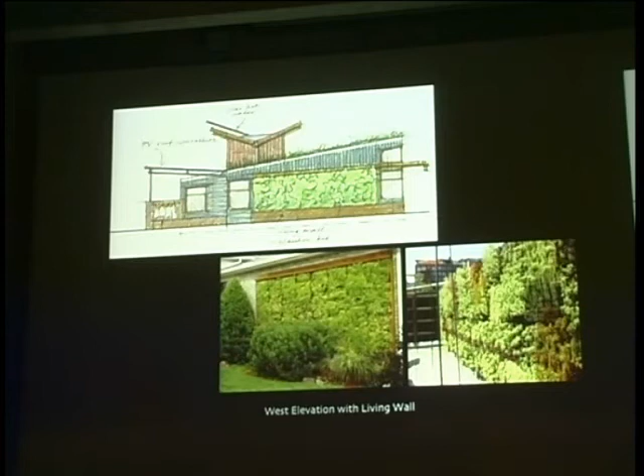And then you enter in this way under a photovoltaic array with everything displayed, opening up to the south. On the west wall, they're going to get a large amount of sun. Usually in the morning it's foggy, but in the afternoon they do get quite a bit of gain. There will be a living wall incorporated into that, as well as living roofs that extend the sense of the habitat, which is just across the way over here.

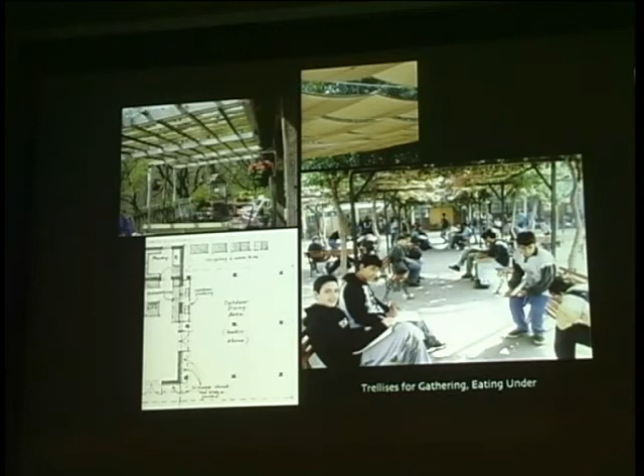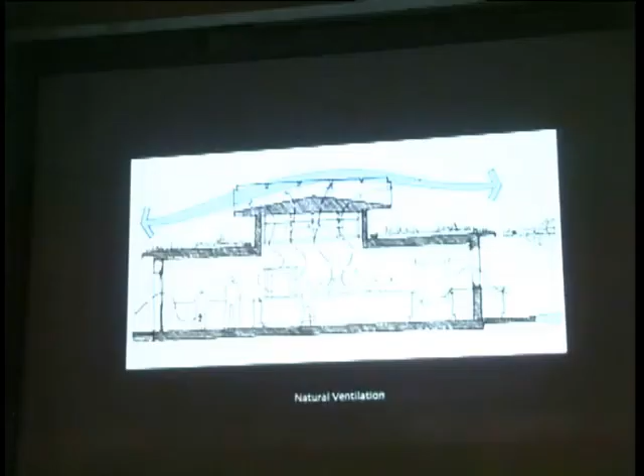Simple natural ventilation, actually in a kitchen environment, was a particularly important piece that we were looking at. And having the breezeway roof, incorporating a wind tower, having everything on display, rainwater harvesting, composting, truth windows so that you can see the systems and have the building be a teaching tool. And this is the model that we built of it to get through the school district, basically.